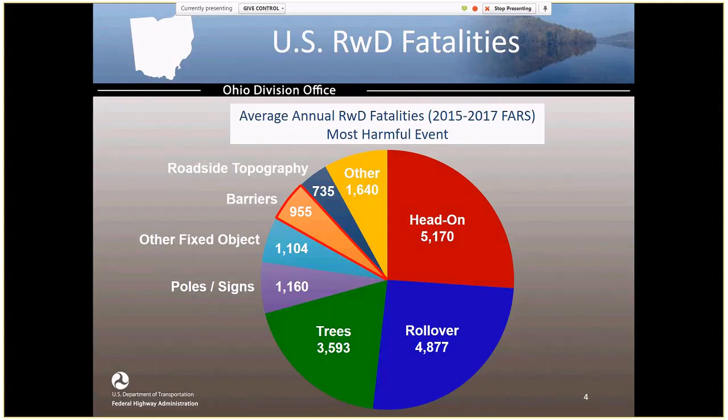But regardless, we place these devices out there to help protect motorists and try to lessen the severity of a roadway departure crash. So their design and performance are of great concern to us. So what can we do to reduce these roadway departure fatalities and injuries on our roadways? Well, there are quite a few strategies that we can employ, and we group them into 3 main areas or objectives. First, what can we do to keep vehicles on the road?

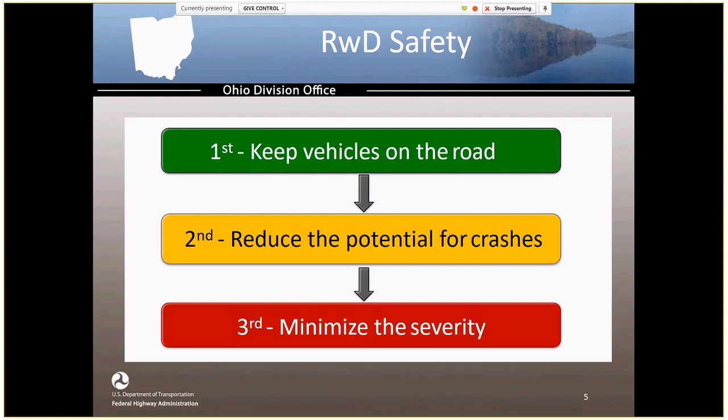Next, if they've left the roadway, what can we do to reduce the potential that they will get into a crash? And finally, if they've left the roadway and it looks like they can't avoid a crash, what can we do to minimize the severity of that eventual crash, which is where guardrail and end terminals come into play.

First, what can we do to help keep our vehicles on the roadway? Well, we have several strategies, and these are the ones that Federal Highway is currently promoting and highlighting. First, we can make sure our pavement has enough friction to help motorists navigate the curves and hills that are out on our roadways. In certain areas, we probably want to make sure we have the best friction possible with something called high friction surface treatment. That treatment uses an aggregate that resists polishing, so it maintains high friction levels over a pretty good period of time. Yes, it comes with a higher cost, so the intent is to use it at the higher risk locations.

Next, we have rumble strips and rumble stripes, which we probably all know. They provide a warning that you can hear and feel, letting you know that you've left your travel lane. Could be centerline rumble strips, edgeline rumble strips, or shoulder rumble strips. Newer cars that have the lane departure warning feature also give you that audible warning. We can also help motorists stay on the road by better delineating our curves with enhanced signage and pavement markings, and also providing lighting at spot locations to improve nighttime visibility.

But we know those strategies may not be enough, so what can we do to help reduce the potential for a crash when a motorist does leave the roadway? So here we're looking at strategies such as the safety edge or clear zone improvements.

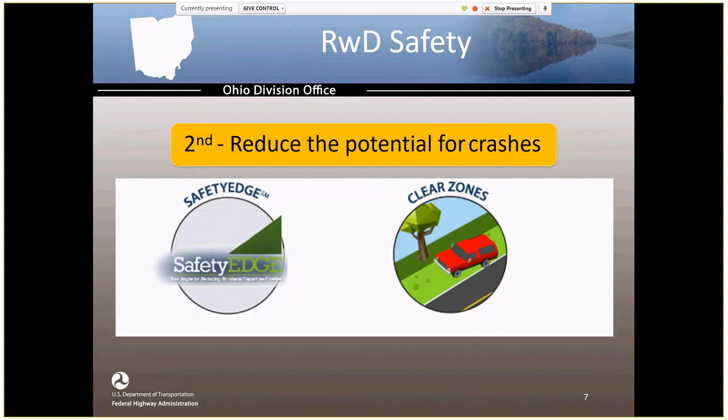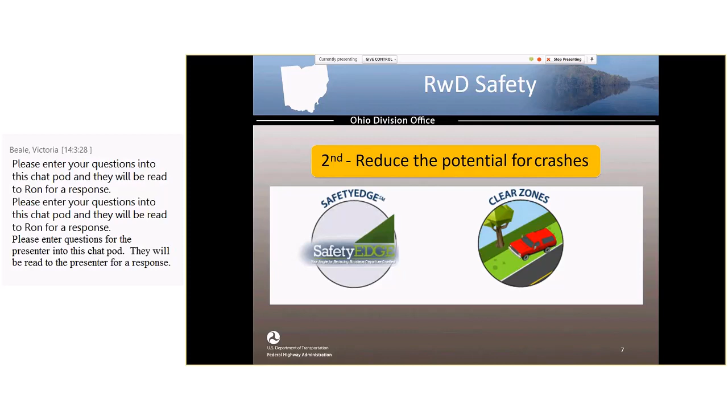While we recognize that this isn't feasible everywhere, we really ask agencies to consider making these improvements at high-risk locations, curves that you know either have a crash history or have the potential for run-off-the-road crashes.

After we tried keeping vehicles on the roadway and reducing their potential for a crash, we come to the point where we accept that they're going to get into a roadway departure crash. At that point, we then say, what can we do to minimize the severity of that crash? Well, we need to take a look at the hazards we have on our roadside. What are people really going to run into? And then follow this preferred order of treatment.

Our hazards could be a steep slope on a high embankment, could be a body of water, could be an overhead sign support, or just large trees. Just like we wouldn't automatically construct a grade separated interchange if you're having crashes at an intersection, we really also shouldn't just be throwing out guardrail if you're having roadway departure crashes.

First, can we remove the hazard? Can we just simply take it out of the location that it's in? If not, can we redesign it? Maybe if we extend the culvert a little and do some regrading, we might not even need guardrail.

Can we relocate the hazard, such as removing trees that are close to the roadway and maybe planting them at or outside the right-of-way? Yes, people don't like trees to be removed, but if you can explain the safety issue and then move or plant them further back, you may be able to overcome their opposition.

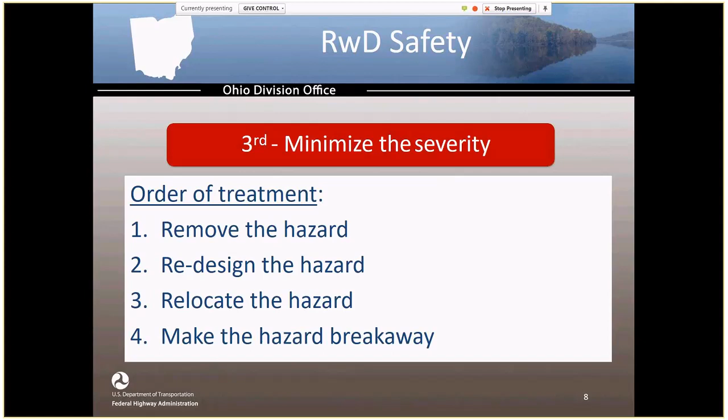Can we make the hazard breakaway, such as what we do with large ground-mounted signs on the freeways? We don't place a barrier in front of them because their supports are breakaway. If we can't do those, then yes, we should shield the hazard with a crash-worthy device, with either a barrier, an end terminal, or a crash cushion.

And finally, if we can't even get a barrier in there, we should at least delineate the hazard so motorists are aware that this hazard exists on the roadside. So with these beginning slides, I hope you have a better sense of the context for why roadway departure safety is a top priority at Federal Highway and how guardrail and their end terminals fit into that context.

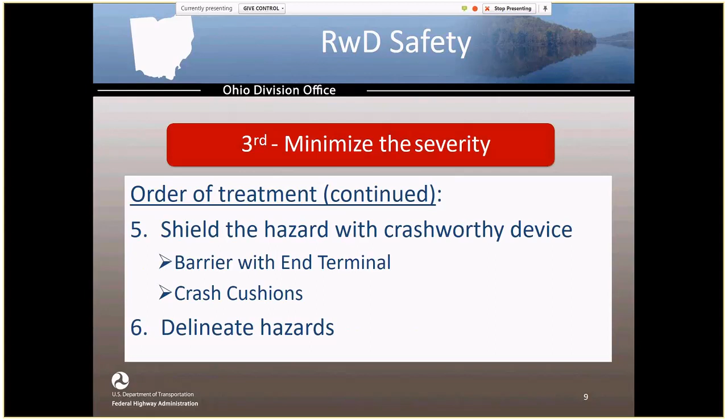We place guardrail and end terminals out there to shield motorists from hazards. If at all possible, we don't want them to become the hazard that causes the most harm during a crash, which, as you saw a little bit earlier, can happen. And that is the overarching principle for installing roadside barriers for guardrail and their end terminals. The barrier out there must be less severe than the hazard. Otherwise, we would rather people just run into the hazard. So the barrier must be less severe.

Again, these barriers are hazards themselves. They have steel and wood components that are strong. They will damage vehicles, and they will impart energy to the occupants inside them. So we must do everything we can to help make sure that striking the guardrail is less severe than striking the hazard that it's protecting. And how we do this is by providing hardware that's crash-worthy.

Crash-worthy means that the hardware is compliant with the testing criteria of the current national standard, which is currently either MASH or NCHRP 350, depending on the device. MASH stands for the Manual for Assessing Safety Hardware, and NCHRP stands for the National Cooperative Highway Research Program. These documents define the criteria that are used to test barriers, as well as the criteria for what needs to happen to the test vehicle for the barrier to be considered crashworthy, which I will better define a little bit in the next slide.

The next key barrier principle is that Federal Highway Administration has a policy that requires that hardware installed on the National Highway System, or the NHS, be crashworthy, meaning it is in compliance with these testing criteria. If you're not sure where the NHS routes are, you can find them a couple different ways. You can just go search FHWA NHS, and we have an interactive map of the NHS for the whole country that you can zoom in and see where the routes are.

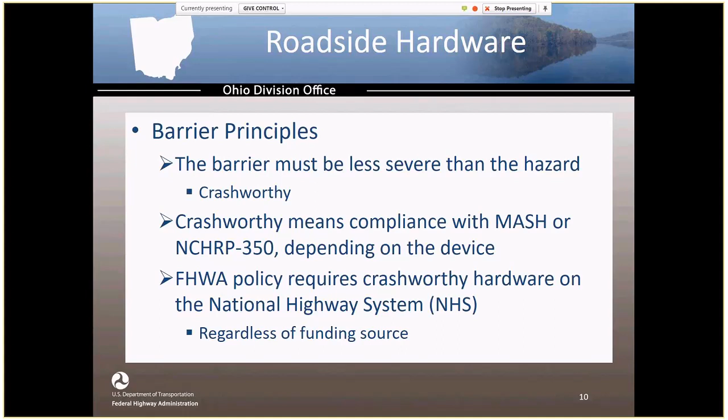Or I know if you go to ODOT's TIMS webpage, there is an NHS layer there that you can select and see where the routes are in Ohio as well. This policy for crashworthiness on the NHS is regardless of funding source. So if you have a local NHS route and you want to install guardrail or replace guardrail that's been damaged beyond repair with local funds, it still needs to be crashworthy. All hardware on the NHS needs to be crashworthy, whether the Federal Highway is paying for it or a local agency is paying for it.

In general, for a barrier to be considered crashworthy, the following criteria must be achieved during the crash test. So the vehicle must be directed or come to a controlled stop and remain upright. It can't roll over at all. There must be no penetration or significant deformation of the passenger compartment. In other words, nothing entering the compartment where the driver or the passengers are.

There also must be acceptable occupant velocities and accelerations. And it's really deceleration forces, because we're obviously crashing them into something and it's stopping, but they are called ride-down accelerations. That's why it's listed as acceleration. And finally, the vehicle must exhibit an acceptable trajectory after impact. There's a certain area that it needs to go through after it strikes the barrier.

We test guardrail and the end terminals under what we call the worst practical condition. That is, we use a car and a pickup truck traveling at 62 miles an hour at several angles that range from 0 degrees to 25 degrees. We don't test every vehicle at every speed and at every angle, but these tests will cover the vast majority of crashes that occur out on our roadways.

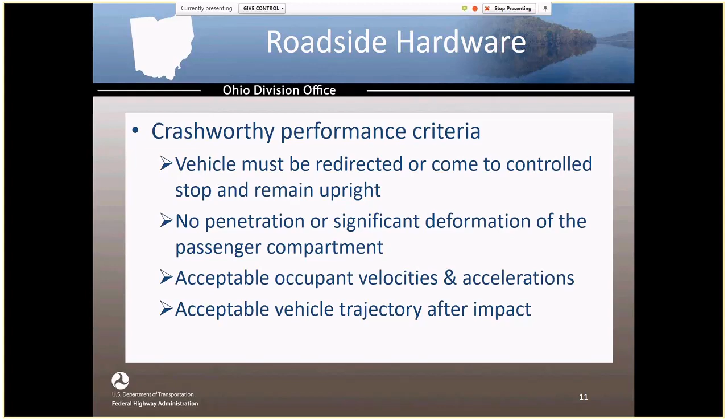Yes, a vehicle traveling 80 miles an hour loses control, starts spinning, and strikes the end terminal with its driver's side door is probably not going to exhibit the crashworthy results that we're looking for. But again, the concept here is that we're trying to account for the worst practical condition, and that's why we use the car and pickup at those speeds and angles.

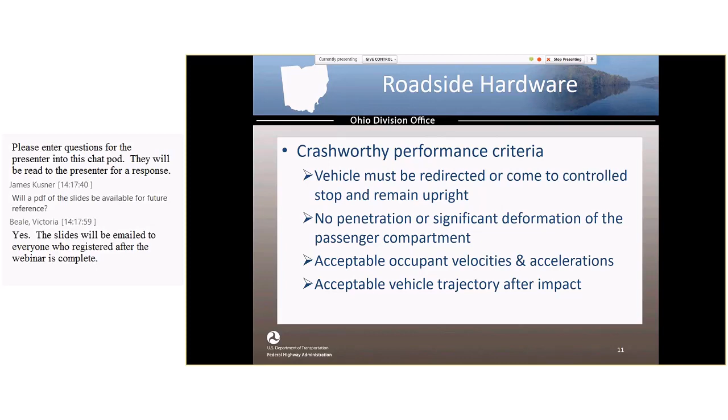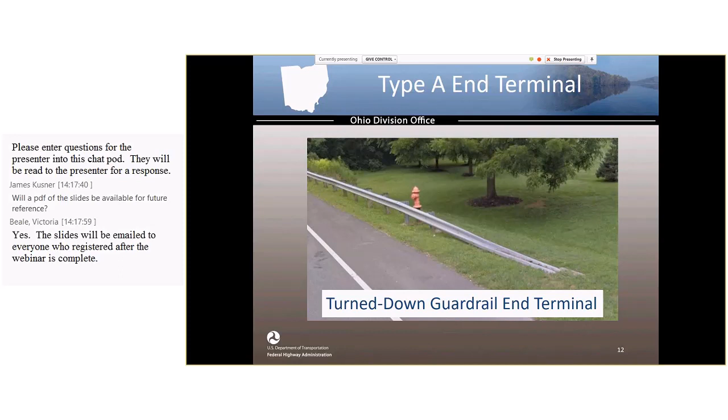Okay, with that background, I'd like to move into the specifics of the turn-down guardrail end terminal. And in case you're not familiar with it, this is a photo of one. Again, in Ohio, it's called the Type A end terminal. First, I'd like to talk about the history of this device and then go into where we are at with it today. So prior to the 1960s, the ends of guardrail runs were basically unprotected. They were just blunt ends out on the side of the roadway.

As you might expect, this led to some tragic and spectacular crashes, spectacular in a bad way. The obvious result is that the guardrail would spear directly into the passenger compartment, seriously injuring or killing the driver and possibly the passengers as well. So in the early 1960s, they came up with the idea to take the first section of the guardrail run, twist it, and turn it down 90 degrees and anchor it at the ground level. It would still provide the tension that would be needed for the guardrail to function, but it would eliminate the spearing problem, which it did do. It basically solved the spearing problem.

However, it wasn't long after that, in the late 1960s, that it became apparent that the turn-down section acted like a ramp, raising concerns of vehicles vaulting and rolling over. In the 1970s, these turndowns were considered good practice and were widely implemented. However, concerns continued to grow with the ramping and vaulting. So in the late 1970s, engineers came up with some updated designs to try and eliminate the vaulting issue. There were a variety of these updated designs.

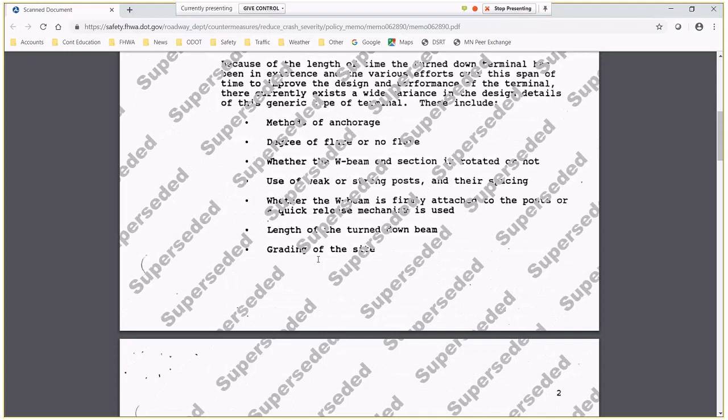Both on this slide and the following slides, the text in blue, these are hyperlinks that take you directly to the memo itself. So for example, if I click on one here, you should see that I'm opening it up. The very first memo in 1990, you'll see has a bunch of watermarks that say superseded, meaning our guidance is really in subsequent memos. However, there is actually good background information if you read this memo. So if you want to read the memos, you can find them via these links.

As we talk about these, just keep in mind that the guidance is mainly for the approach ends of the guardrail runs as you're approaching. It doesn't technically apply to the trailing ends unless there is the likelihood of an opposite direction impact, where a vehicle could cross over and maybe hit the end from the opposite way.

So the first memo that we issued was back in June of 1990, which is actually 29 years ago now. The memo was prompted by increasing concerns out in the field coming from both state DOTs and our Federal Highway Division offices. And the problem continued to be the vaulting and rollover of vehicles that were hitting these. The memo talks about these problems occurring with all variations of the turn-down designs, including the flared and quick release mechanisms. It also states that these end terminals are not to be used on high-speed, high-volume roadways.

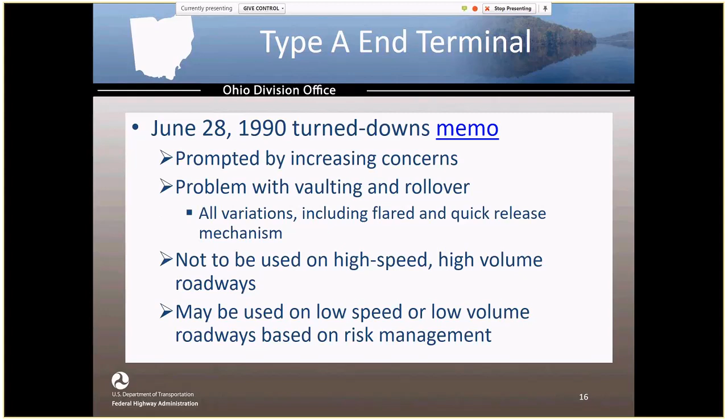So that was sort of the first official position we took on these devices. The memo states that they, at the time, may be used on low-speed or low-volume roadways based on risk management. So it didn't call for their complete removal in 1990, but just from high-speed, high-volume roadways. And this is a video from around the time of the first memo showing the issue that was being reported. And hopefully you'll be able to hear the sound on this as well as I play it.

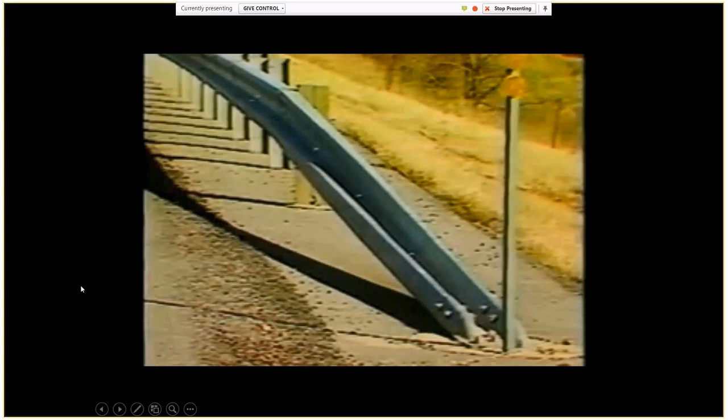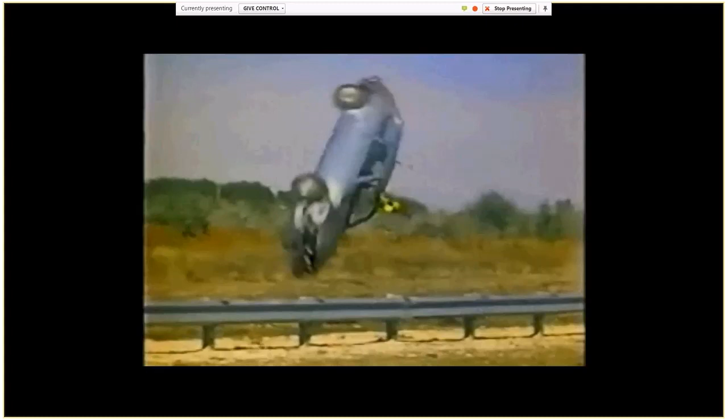We'll call this end treatment the twisted and turned down treatment. The major problem with developing this system has been with cars vaulting and or rolling over. This occurs if the impacting vehicle rides up on the twisted section of the system and crosses the first backup post.

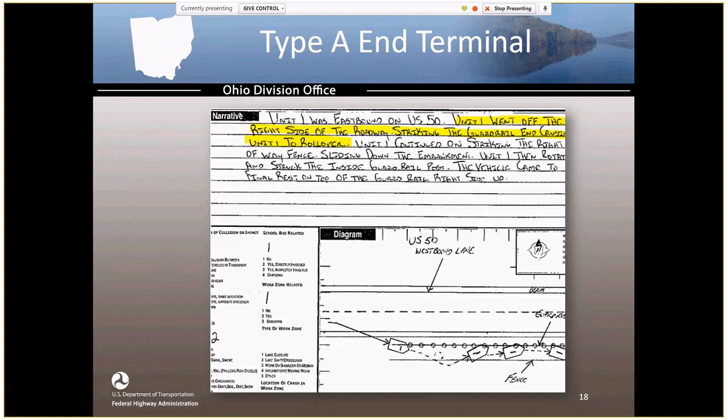4 years later, in September 1994, Federal Highway issued its second memo, providing some clarification and guidance on various obsolete hardware and what we at the time called poor practices. In this memo, we stated that new turn-down installations are no longer acceptable on high-speed, high-volume NHS routes. In addition, the state DOT must submit a plan and schedule to the Federal Highway Division offices for the replacement of all turndowns on the interstates.

The existing turndowns on other NHS routes were to be replaced during times when roadway work comes in those areas. But the call was made 25 years ago now to systematically have a plan to replace them all on the interstates. And damaged turndowns are to be replaced with crashworthy terminals, not just in kind. So again, this memo was focused on the NHS specifically.

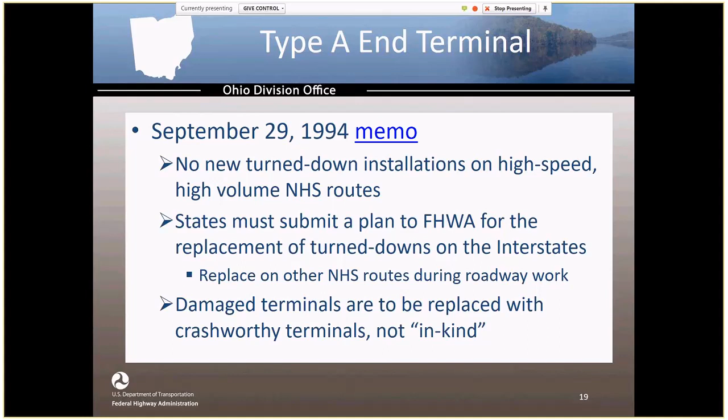So time goes on throughout the 90s and early 2000s, and then we come to November 2010 when we issued our next memo. In this memo, Federal Highway stated that it has been more than 15 years since the 1994 memo calling for turndowns to be removed from the NHS and saying that it's time for all remaining turndowns on the NHS to be upgraded as soon as practical.

The memo goes on to say that turndowns may be used on the trailing end of a guardrail run to anchor the rail if it is outside the reverse direction clear zone and if it cannot be struck from the opposite direction. So again, we're continuing this theme of really applying to the approach end at this point.

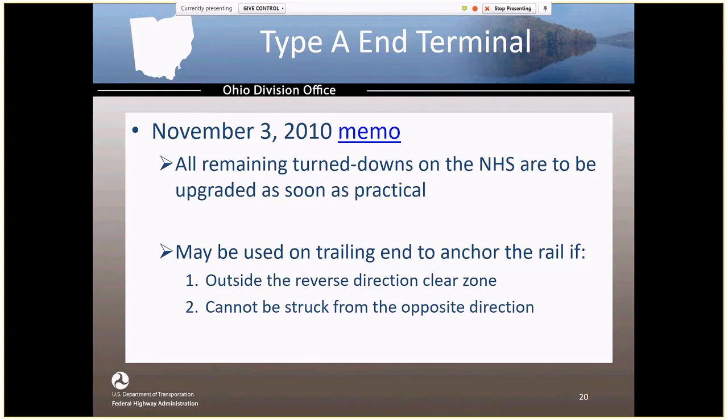Just a note that if you pull up this memo, you need to go to the frequently asked questions in the back to find the guidance on the turndowns. The other ones were specific to turndowns, but you see as you scroll down, it'll say what guardrail must be replaced, and then it includes turndowns in here with a note to follow.

And then we come to our fourth and most current memo that discusses turndowns, which we issued back in May of 2015. This memo states that obsolete, non-crashworthy end terminals still remain on our nation's highways, and that Federal Highway is trying to raise the awareness of these end terminals through a series of memos over the last 25 years.

Agencies should increase their efforts to systematically upgrade pre-NCHRP 350 end terminals, which the turndowns are. They never were determined to be crashworthy under any criteria, and we want to upgrade those, particularly those on the NHS. So as you can see, while the emphasis is on the NHS, we did write that in such a way that we were now recommending that they be upgraded on all roadways.

So you may be thinking, I understand what you're saying, but do we really have a problem with these? I don't recall seeing anything in the media about crashes involving these. Doesn't seem to be a big issue, or I would be aware of it. Maybe you would expect that we would hear more about this. Well, I do have a couple of examples just to show that these types of vaulting and rollover crashes still do occur. They're not in huge numbers. If you remember from that pie chart, they're not the number one most harmful event, but they do occur.

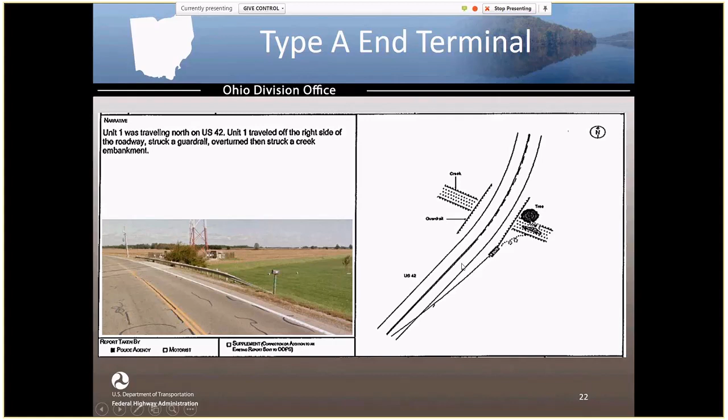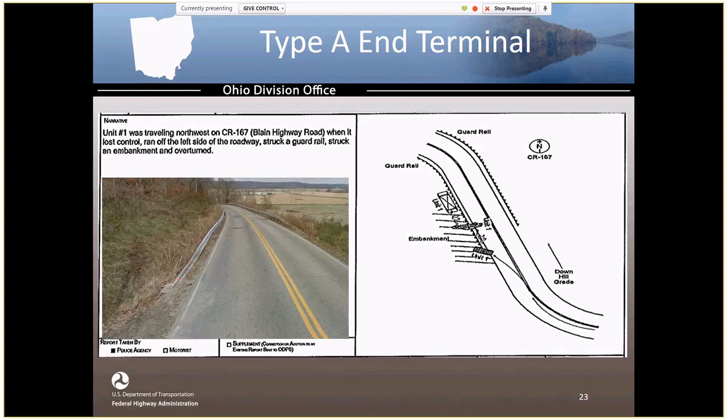Quick point of note on either of these, they were vehicles that were approaching a curve. This one in particular, the officer, you could see on the right, noted that it was a downhill grade. So it was a combination of horizontal and vertical geometry where we often find vehicles leaving the roadway. Yes, they do leave on tangent sections, but curves are definitely overrepresented.

So what is our status here in Ohio with complying with that policy that all turndowns be removed from the NHS? Well, ODOT is currently in the process of removing all of the remaining Type A's from the state-maintained NHS routes. ODOT Central Office worked with the districts to identify how many we had out there, and then over the last couple of years have been getting projects sold to remove and replace them.

And this does cover all Type A's on the NHS with one exception, that being the trailing ends on the outside of divided roadways if there's no likelihood of an opposite direction impact. So you may still see some on the NHS, but they should only be on trailing ends in these locations.

So now that the state NHS removal plan is being implemented, the question then becomes, how many of these end terminals do we still have out on locally maintained NHS routes? And how can we get those removed? So ODOT is currently working to identify how many we have out on the local NHS, and we'll be soon working with the local agencies to get them removed. Both of these programs have been funded by ODOT using Federal Highway Safety Improvement Program funds, which is our federal safety funds.

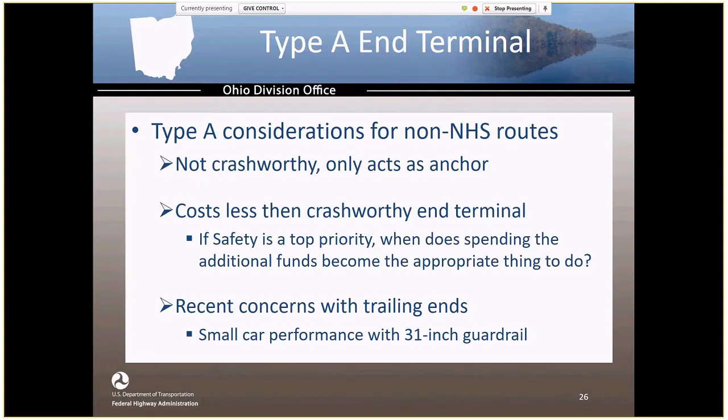One more video I have. The first part of the video is basically the same thing you just saw a little while ago, and it's followed by a crash test video for a crashworthy end terminal. And as you watch this video, I would just ask, which one of these end terminals would you rather hit if you left the roadway? Or would you rather that somebody you care about hit if they left the roadway? So I will go ahead and try to play this.

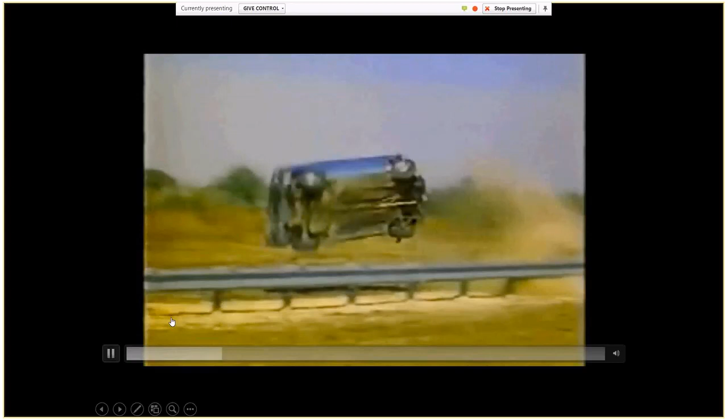Has been with cars vaulting and or rolling over. This occurs if the impacting vehicle rides up on the twisted section of the system and crosses the first backup post.

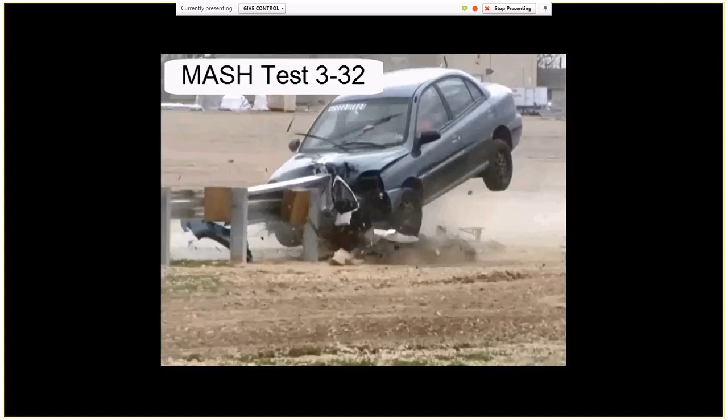So as you can see, that second part of the video was a newer MASH compliant crashworthy end terminal. And yes, the back end of that vehicle did raise up off the ground a fair amount, but compared to vaulting over, rolling over several times, landing behind the guardrail, this is obviously a much more preferred outcome for what we want when somebody in a small car going 60+ miles an hour strikes the ends of these guardrail runs.

So in summary, it is FHWA policy that all roadside hardware installed on the NHS shall be crashworthy. Again, regardless of who is paying for the installation, whether it's federal funds paying for it or just local city or county funds paying for it. We at Federal Highway strongly encourage that crashworthy hardware be used off the NHS as well. Again, our policy and jurisdiction for hardware only applies to the NHS.

However, again, we know the vast majority of our system is non-NHS. People leave the roadway, whether it's NHS or not, for a variety of reasons. And our goal with the barrier, again, is to be less of a hazard than what that barrier is protecting. Quite simply, Type A's are not crashworthy, and they have been considered obsolete for some time now. And that is why they're being removed from the NHS routes in Ohio.

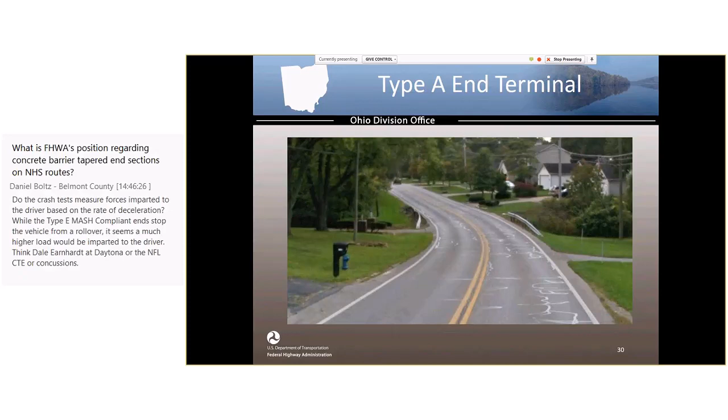So this is an example of one that is actually relatively close to us here in Columbus that I drive by occasionally, coming down a hill in either direction. The culvert here is right in the horizontal curve and obviously at the low point of the roadway. So it wouldn't take much to veer off the right side of this roadway in either direction, but notably in this direction, and hit the end of that guardrail, and then you're almost certainly going to be launched off into the property that's there.

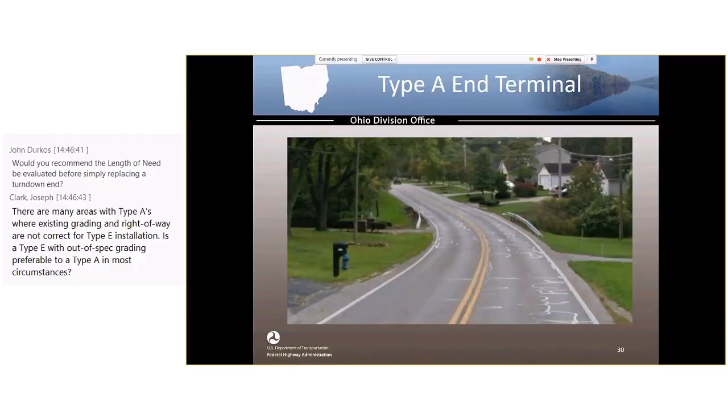So I think our suggestion would be to see where your higher risk curves are on your system. I assume that the local agencies typically know where their problem areas are, and the state does as well. And yes, we maybe can't replace all of these all at once, but as we go through time, if we commit to getting the higher risk ones replaced and upgraded, then we'll have a safer roadside.

So I've got some more questions for you, Ron. They came pouring in. The next one is from Daniel Boltz in Belmont County. He wants to know, do the crash tests measure forces imparted to the driver based on the rate of deceleration? While the Type E MASH compliant ends stop the vehicle from a rollover, it seems a much higher load would be imparted to the driver. Think Dale Earnhardt at Daytona or the NFL CTE or concussions.

Yes, I believe the crash tests do measure those forces. That's those occupant velocities and those ride down accelerations. And it does seem like that car that was just coming to a stop, hitting that MASH compliant one, going from 60 to 0 in a matter of a second or two, would seem to be higher.

However, that end terminal is designed to absorb that energy as the vehicle is striking it. So yes, some of the energy is imparted to the vehicle and the compartment, but the majority of it is absorbed by the terminal itself. So just what we've seen is those are clearly safer at 62 miles an hour. Yes, the Dale Earnhardt at Daytona was a different situation, going 200 miles an hour. And I know they've changed their barrier system on their racetracks since then.